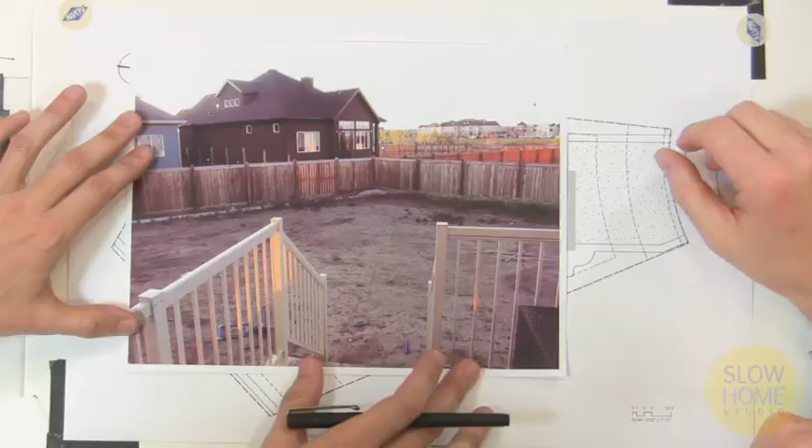This is the photo they sent us of their backyard, and hence the problem. It's kind of overwhelming. It's a huge lot, there's other houses all the way around, and they had a deck built right up against their house, but it wasn't very functional. Fortunately, we can take the deck, the guardrail, all of that off and start afresh.

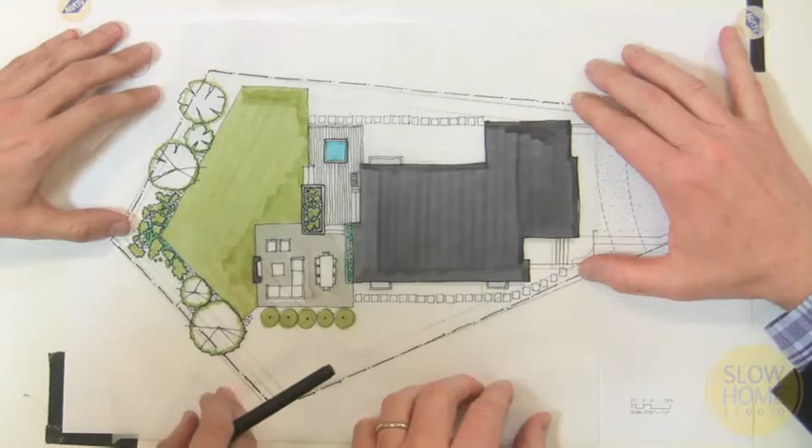Here's the original site, very typical. It's a pie-shaped lot. We've got a big backyard that needs some definition. So this is kind of what we came up with, and what we thought we'd do is zone a whole bunch of outdoor living spaces for different activities.

They wanted a place for a hot tub. We thought we would create a deck that was basically almost at the same level as the living room, scaled to fit the hot tub. We created some privacy, and a little bit of seating space, and a place for the barbecue.

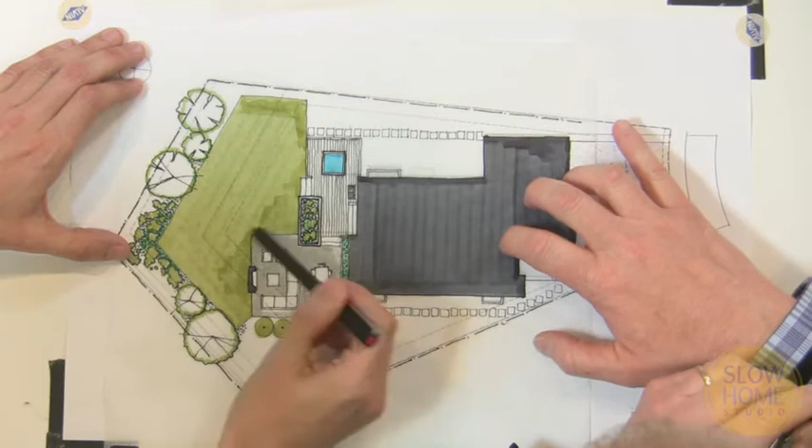This is really a barbecue place. Exactly. And then what we thought we'd do is come down to grade, and at grade have an outdoor room with a living room and dining room space. We'd shield it with some trees, and then create a big play space for the kids that was viewable from the living spaces, so mom could watch them from inside the house. And then on the perimeter of the property line, we'd add some vegetation so that it created an edge and defined the property.

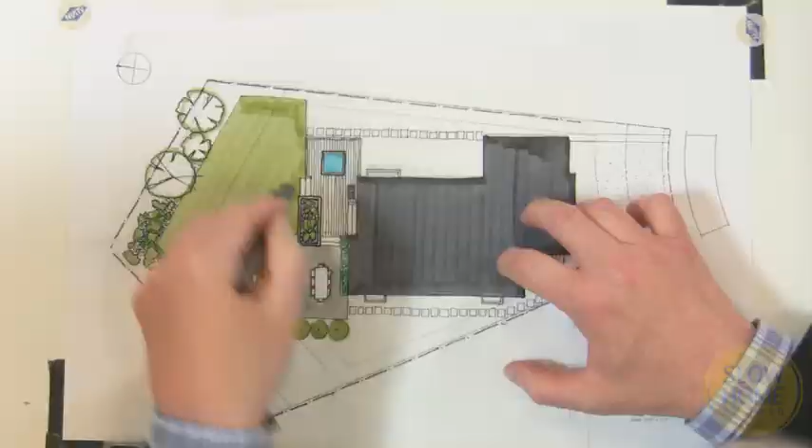All of the space here that you see in white, we're recommending be done in landscape gravel or some other xeriscape material. Really keep the lawn space down to the usable space you're going to need. It takes a lot of water to look after those yards, and we just need to avoid that.

So the big issue, as we can look at this in a three-dimensional view, was that we wanted to avoid the use of guards. You do that by stepping no more than 2 or 3 risers at a time from any one deck level. That means by code you don't have to have a guardrail.

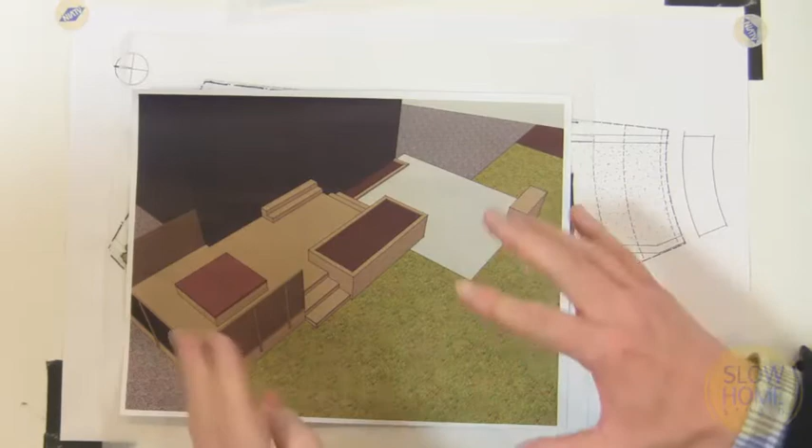So we come out of the dining room, down 2 steps, and then into this area where the barbecue is. We've got the space for the hot tub, and then we come down those last 3 steps to either the grass or the sitting area.

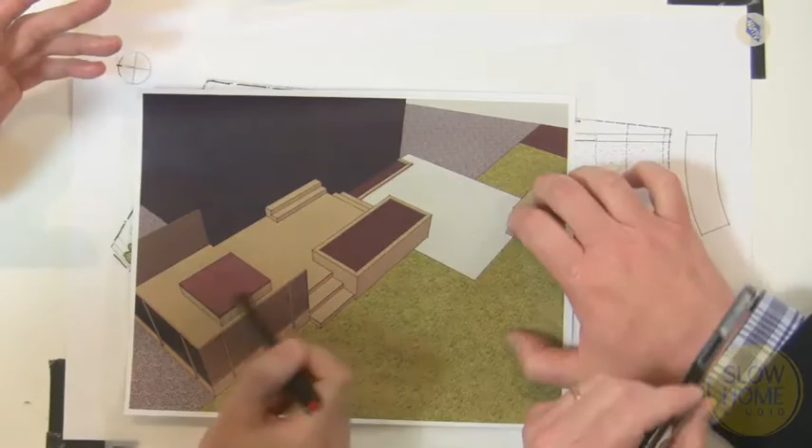I love the hot tub area because it's kind of like an outdoor cabana, since it's scaled to fit the tub. There's enough room to walk around it, and then we put these slat screens around to provide privacy, because from the site photos everybody can see there's not a lot of privacy since the other houses are all around. So that's really critical, and we think it's also going to be beautiful to look at.

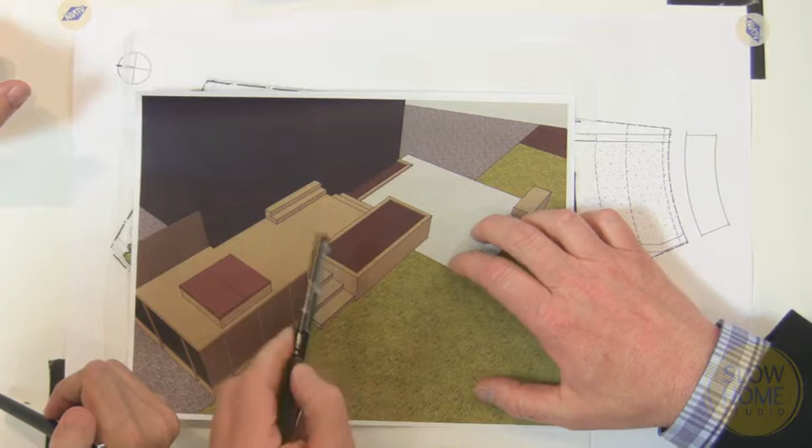So then this small planter here, hopefully we can size that so it's just at seating height, so that if you're having an overflow party or a barbecue, people can sit around this. It would have some low plants in it that don't require a lot of water and don't grow up to shield that view from the inside.

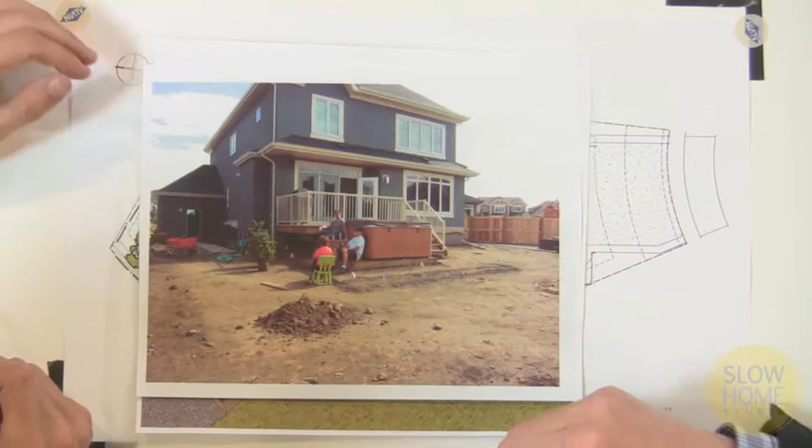So here's one last view we want to show you. Here was the original photograph that Shannon sent us late yesterday. We asked for a rear image of the house, and this is what our proposal looks like. You have to imagine those rails aren't there. I think what's really interesting is this shows the scale of the built portion of the backyard design, and we've tried to make that built portion actually quite small, because the built portion is the expensive part. So if you scale that down and do the rest with landscaping, and put your outdoor space at grade, it's a lot more economical, and you get a lot more bang for your buck.